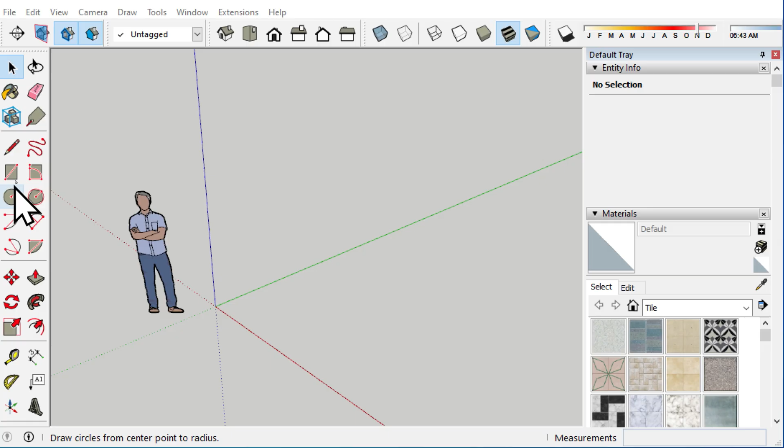Take a rectangle, draw a rectangle of 975 mm by 600 mm, with the help of push-pull give the height of 2100.

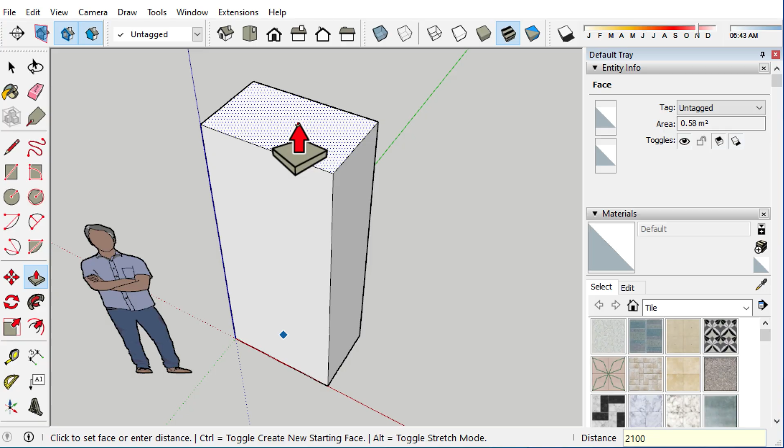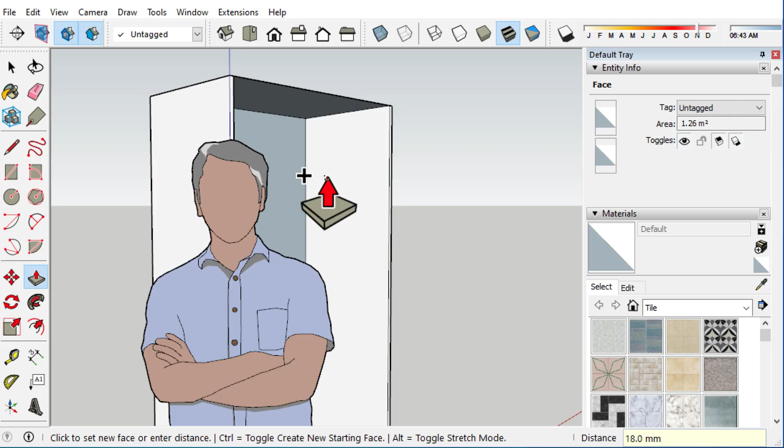Select the front face and delete. With the help of push-pull tool, push-pull the face to 18 mm, and the skirting to 75 mm. For the back we are going to push pull 8 mm.

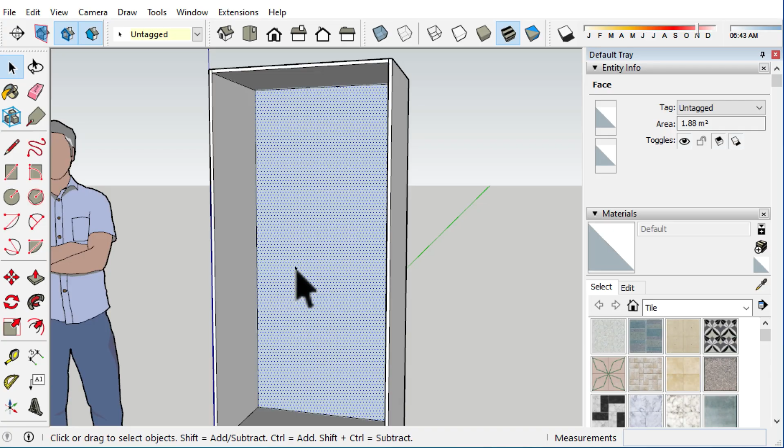This is the box for the wardrobe. Now we are going to create two drawers, the basic wardrobe.

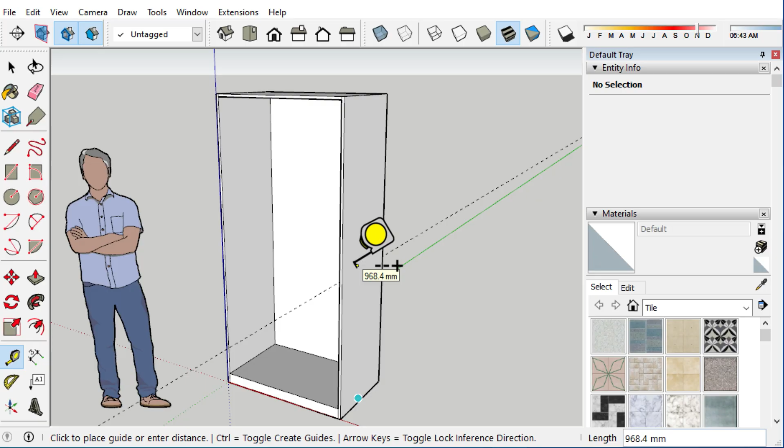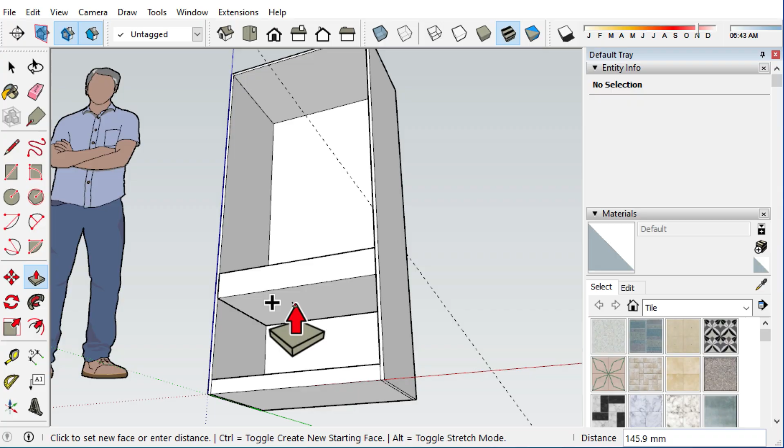With the help of tape measure, measure 900 mm, take a reference line, select the plane, take a move tool, press Ctrl to make a copy and take a reference of 900 mm, and push pull it to 18 mm.

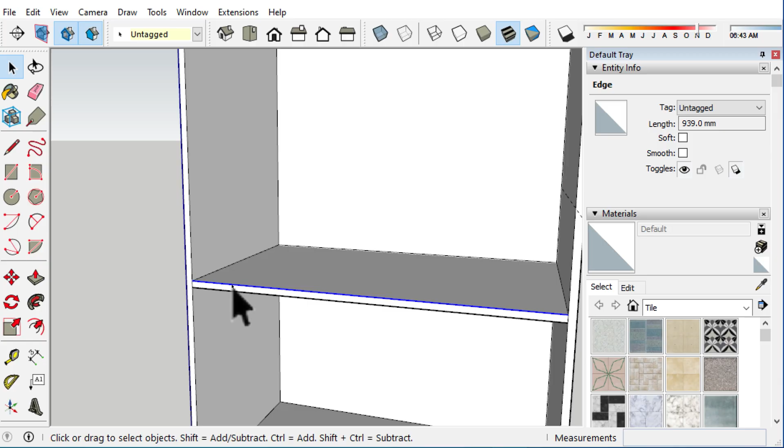Here we are making the drawer, so you need to give the gap between shutter and the drawer. So push pull the drawer inside 50 mm, then select the plane, push pull it to, hold the control and push pull it to 125 mm.

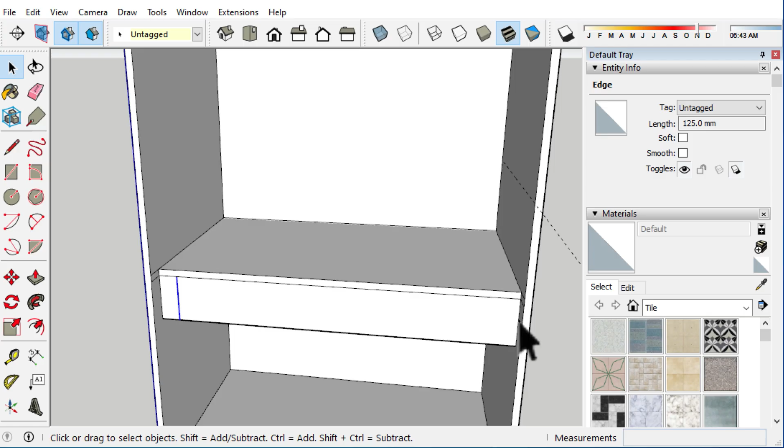Select this line and give the packing of 50 mm on both sides. Take a line tool, draw a line in the center, taking the reference of midpoint.

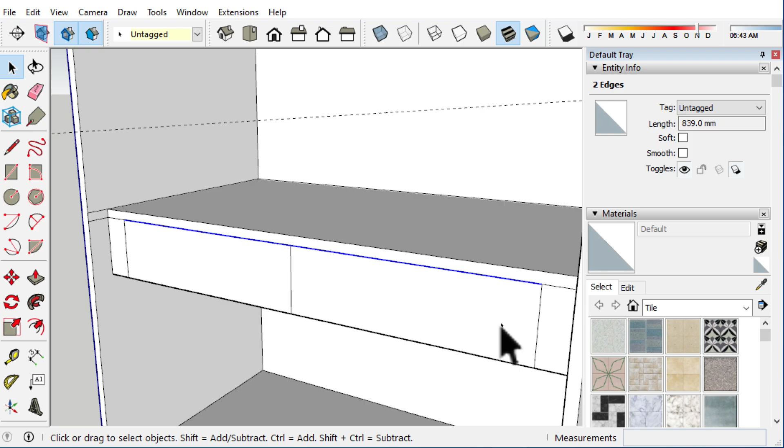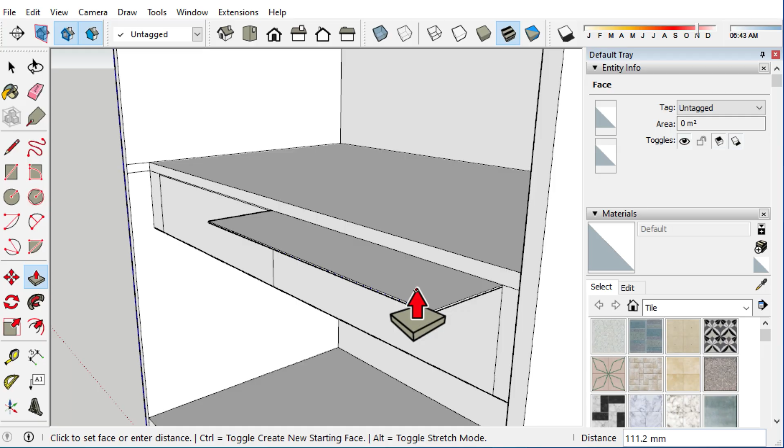Now we are going to create the grooves. So select the line and copy it at 2 mm. Push pull inside 18 mm. Same over here, select and push pull.

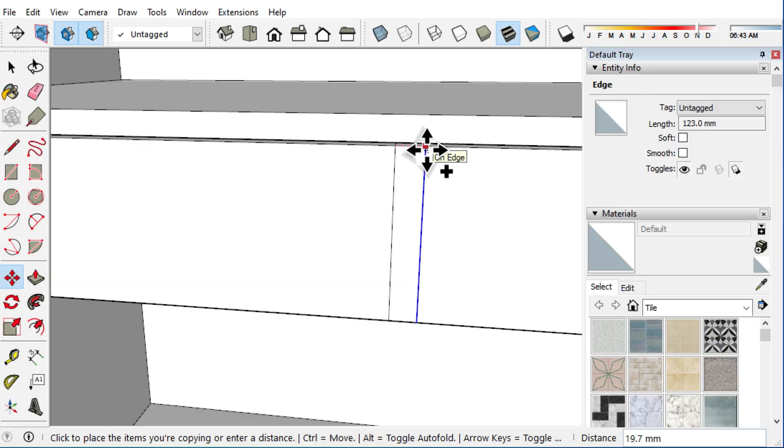For the front groove, we will select and make a copy at 1 mm on other side. Delete the midline. Push pull it to 18 mm.

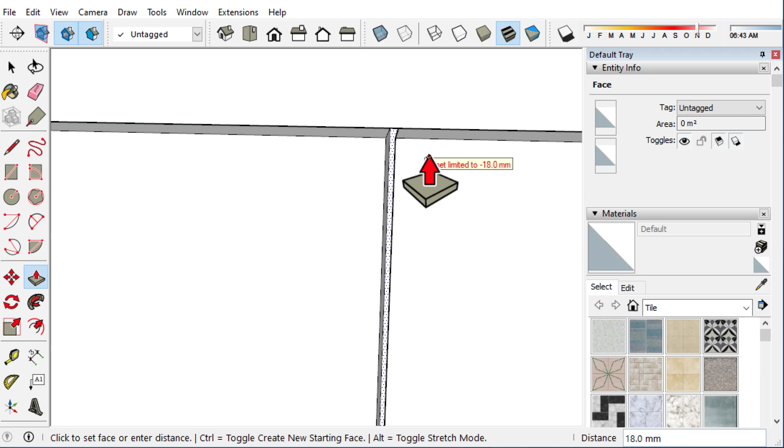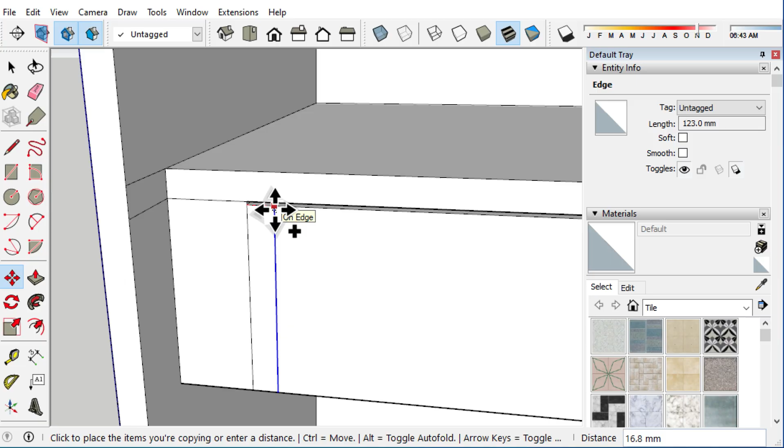For this side of the packing, 2 mm, push pull to 18 mm. This side of the packing again, copy the line 2 mm and give the push pull. That's how we have created the drawers inside the wardrobe.

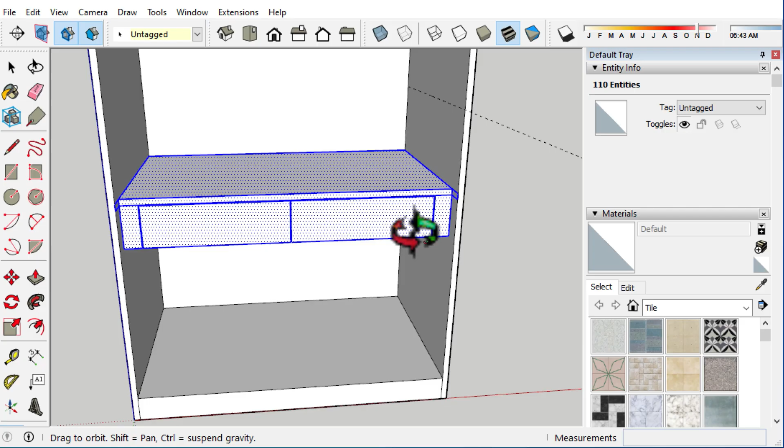I'm just adjusting the height of the drawer. So in the front view, I'm going to select the drawer and adjust the height of the drawer to 900 mm.

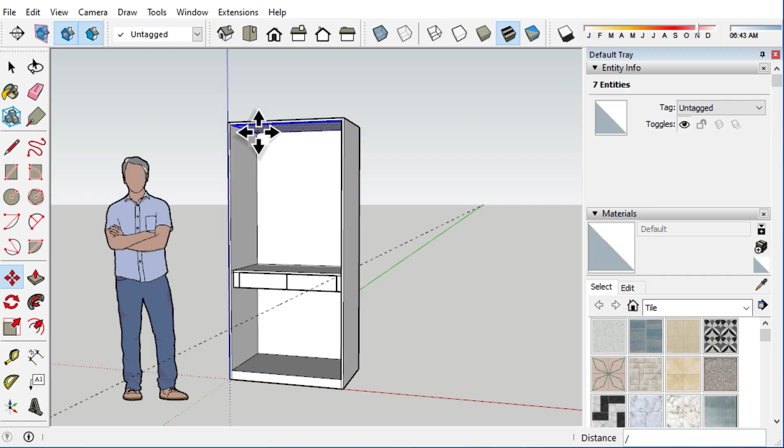Now we are going to add the shelf. For adding the shelf, select the plane, move it to the top, place over here, then type slash. I want 3 shelves, so I am going to type slash 3. It will automatically make the copies and divide it into 3 equal parts.

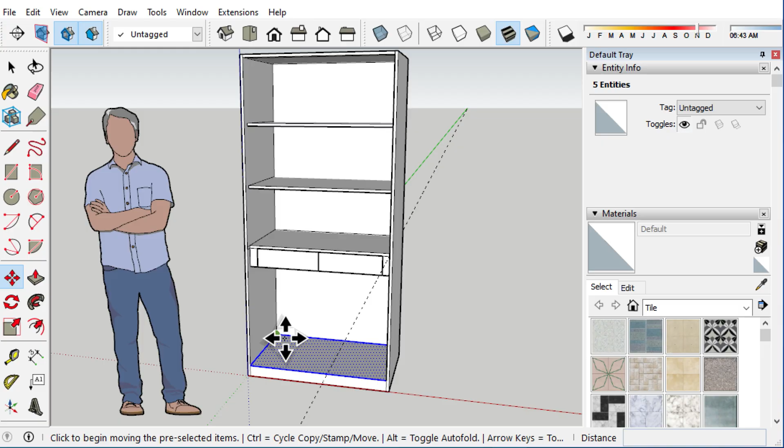I will just push pull it to 18 mm, shelf thickness, same at the bottom. Select the shelf plane and place it in the midpoint. Push pull it to 18 mm. We just need to push the shelf inside and take the reference of drawer.

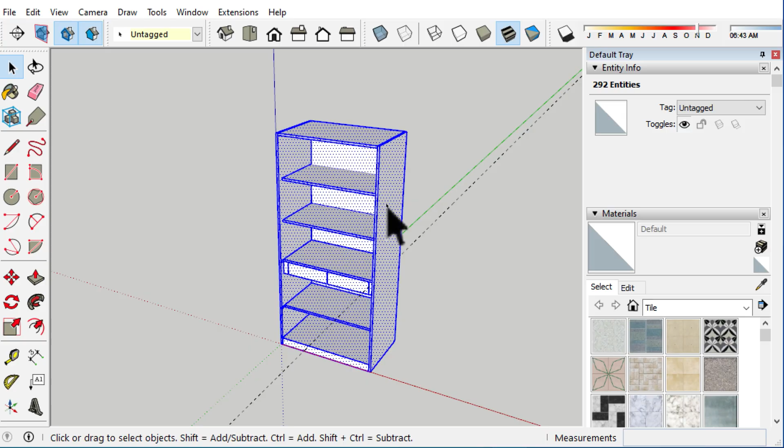That's how we can create a simple wardrobe. Select the wardrobe and create a group.

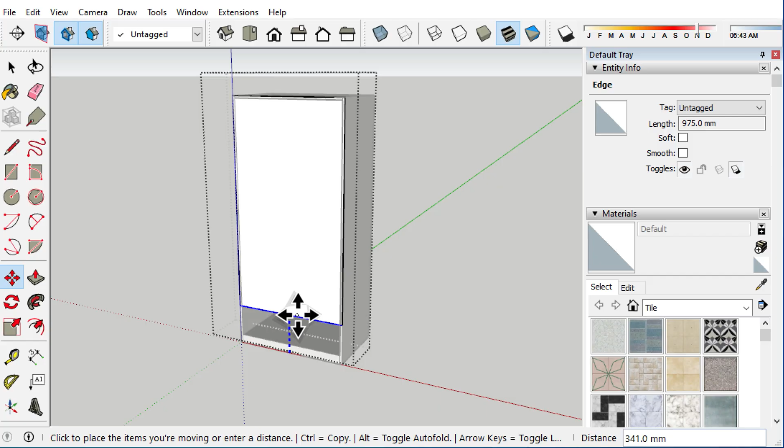For making shutters, take a rectangle, take the reference point and draw the rectangle. Select the rectangle and make group. Select rectangle, move it upward 75 mm to show the skirting.

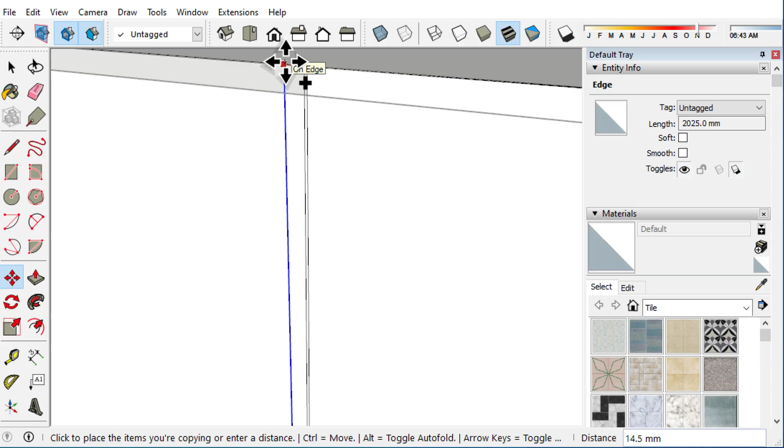Draw a line in the center for making two equal divisions. Select the line and make a copy at 2 mm. We are going to show the 4 mm groove, so either side to 2 mm copy. Delete the middle line. With the help of push pull, give the shutter thickness of 25 mm.

That's how we have created a simple wardrobe. Just hide this, and this is the inner, and this is the shutters.

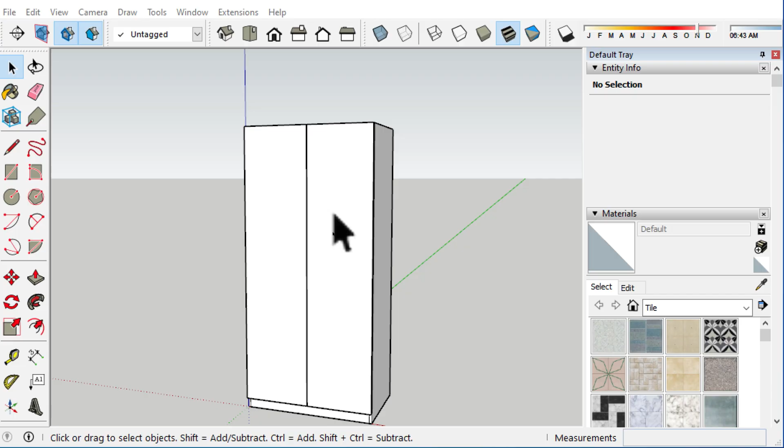Now save the file. If you want to create any pattern on shutters, just take a line from the midpoint to this, go inside the group, select the line, edit, cut, go inside the shutter group and edit, paste in place.

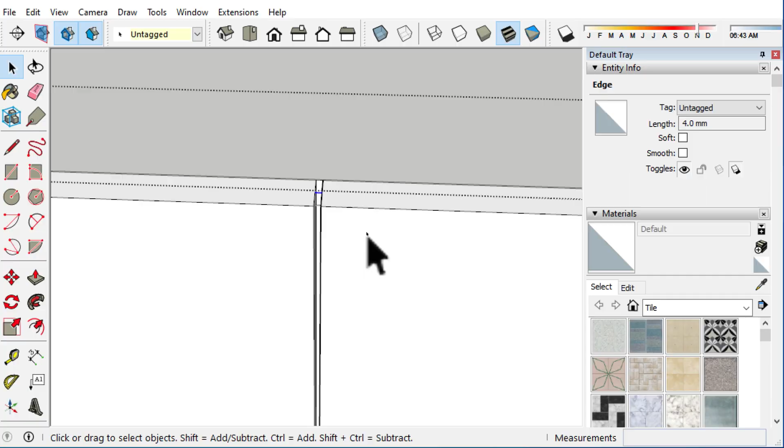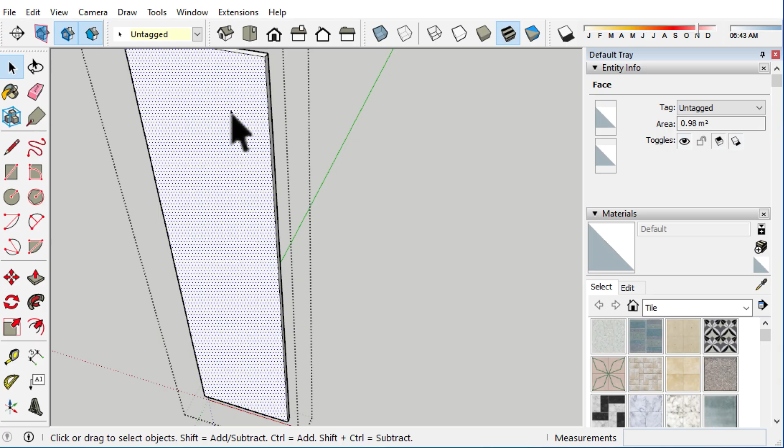Select the shutter and just push pull inside, and delete the shutter. I will select the shutter, this shutter. I will select this shutter, holding shift I will deselect this line.

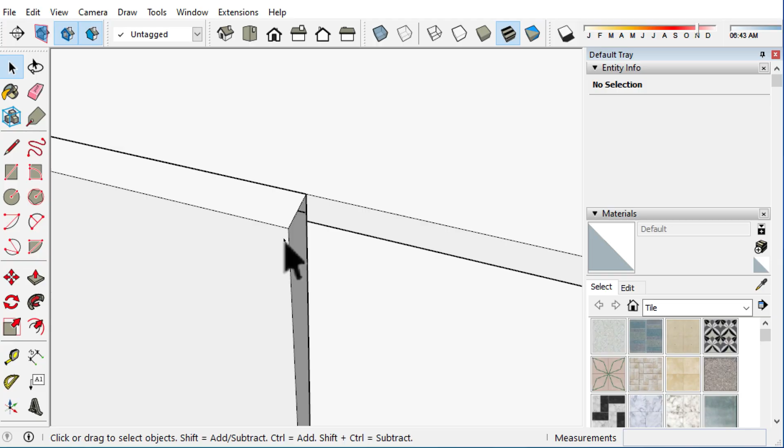I will make this group and then make component. Now this shutter is a component. I will make it component. Now this shutter is a component.

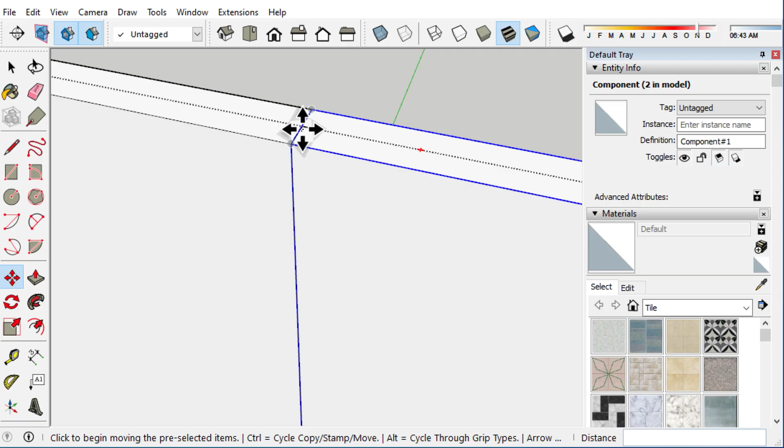I will take this component and make a copy, and place it at the top and place it at this point.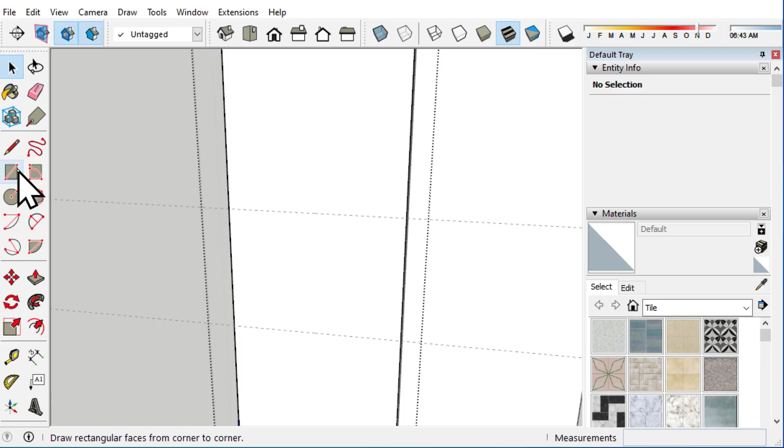I'm going to create a simple groove pattern inside the shutter. I will take a tape measure, take a reference at 550, again take a line at 900 and I will make a rectangle. The benefit of making component is whatever design I make over here will automatically update over the other shutter. I don't need to model the design on both shutters.

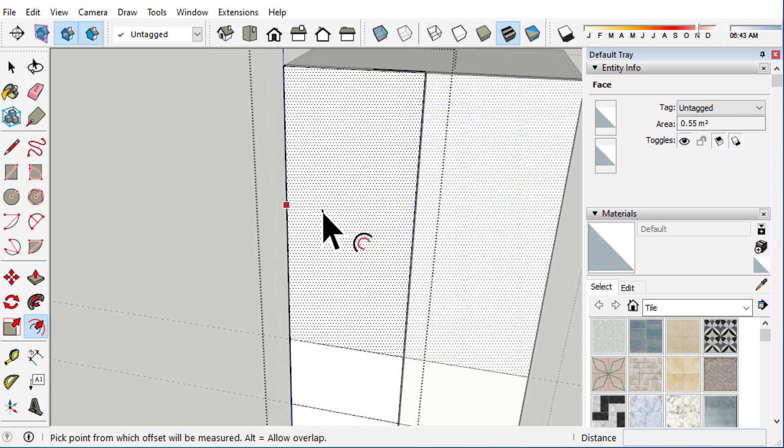I will just select this and give offset of 50 mm. I will select this and give offset of 50 mm. I will select this rectangle and push pull it to 6 mm.

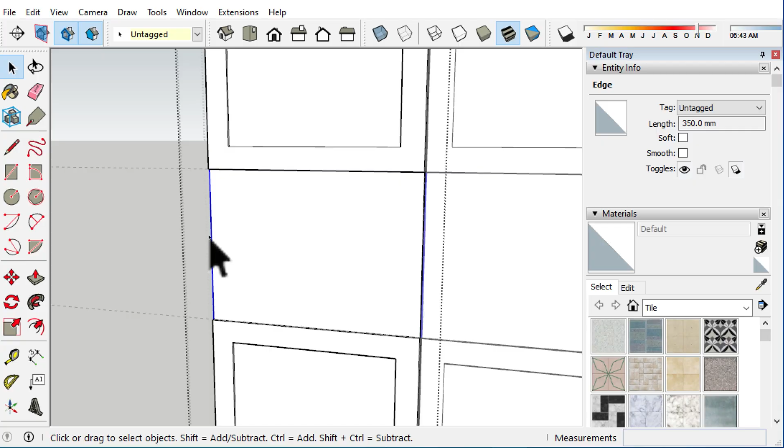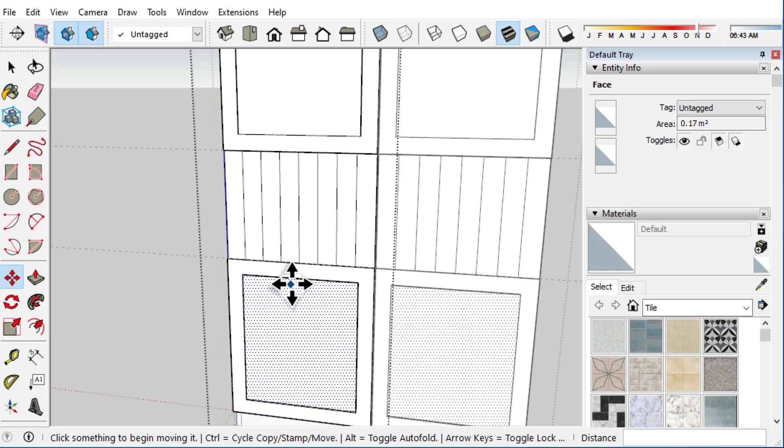Same with here, I will select this line and make a copy of this line and divide it equally into 8 parts. I think I should divide it in equally 10 parts, maybe 12 parts.

For making grooves, I will just copy the line 2 mm at the sides. I will select both the lines and make multiple copies by holding Ctrl.

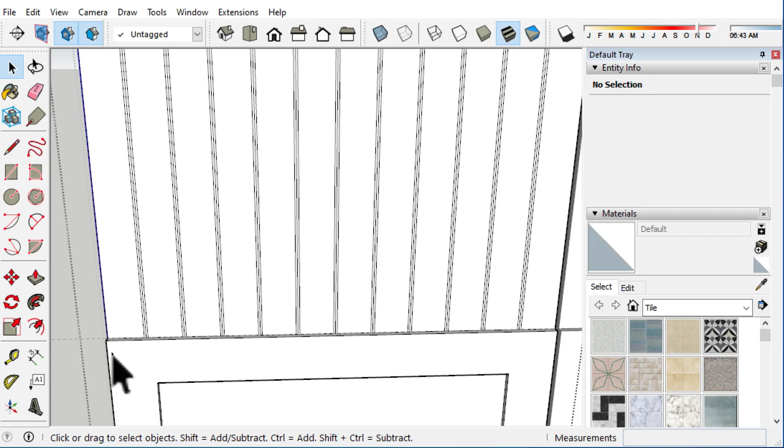Now I will select the face and push pull it to. For making grooves at the downside, I will push pull the face, this face to 4 mm. Holding Ctrl, 4 mm, and at the top I will also push pull this face to 4 mm. Hold Ctrl, push pull it to 6 mm.

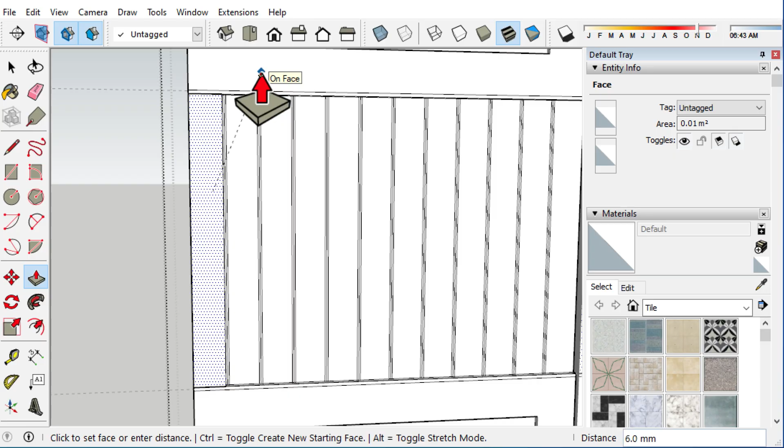Take the reference of this, and now I will just double click each and every face. For making groove, I will again push pull it to -6 mm. I will delete all the guidelines. That's how the simple wardrobe modeling is completed.